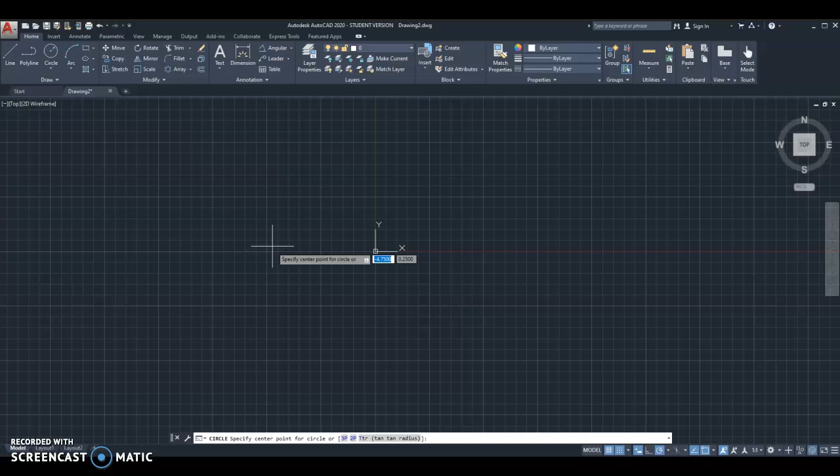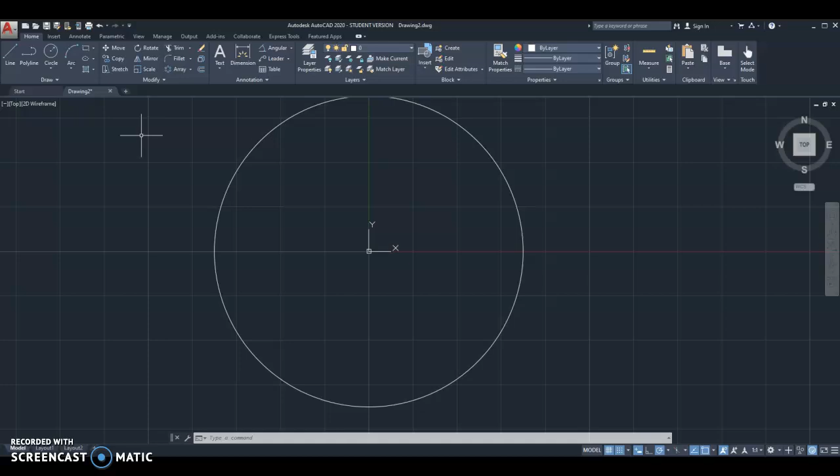I'm going to start with the front view and start by drawing some of the circles. So I'm going to start with a circle at the origin, 0, 0. And the flange has a diameter, so D, enter, of 3.5. The main hub has a diameter of 2, D2. The through hole has a diameter of 1.

And there's a taper on the far side, like a chamfer, that's going to show up on this front view as a hidden line, and it has a diameter of 1.5. So I'll just switch over to my hidden layer. As a reminder, you should be using your template that we created so you don't have to be recreating these layers every time. And this has a diameter of 1.5.

Now the flange has a bolt circle. It has 8 holes that are equally spaced, and they're on a bolt circle that has a diameter of 2.75. Bolt circles are just imaginary circles that are used to locate holes. And so we're going to use the center line layer for that because it passes through the center of the holes. And so it has a diameter of 2.75. Okay, so those are all of the concentric circles.

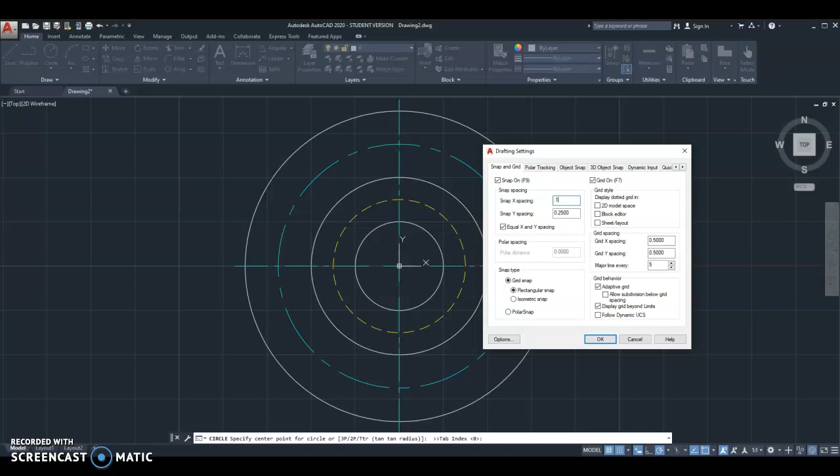My grid snap isn't wanting to snap to any of those locations, so that tells me I need to adjust it. Let's go to snap settings. Right now it's set at 1/4 of an inch. I might need it to go down to 1/8 of an inch, 0.125. Let's try that again. There we go. I have my object snap turned on, but I haven't taught you how to use that yet. So with the grid snap, the snap mode will allow me to snap right to that point where the bolt circle and the center mark intersect. So I'm going to put the first hole there, and it has a diameter of 0.25.

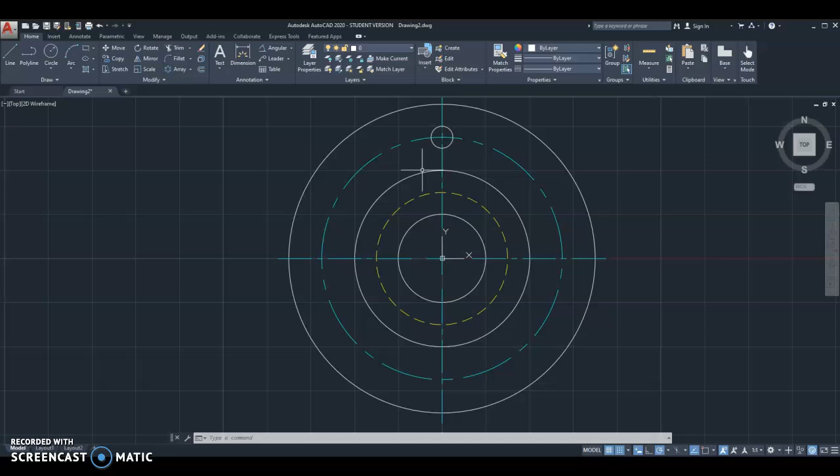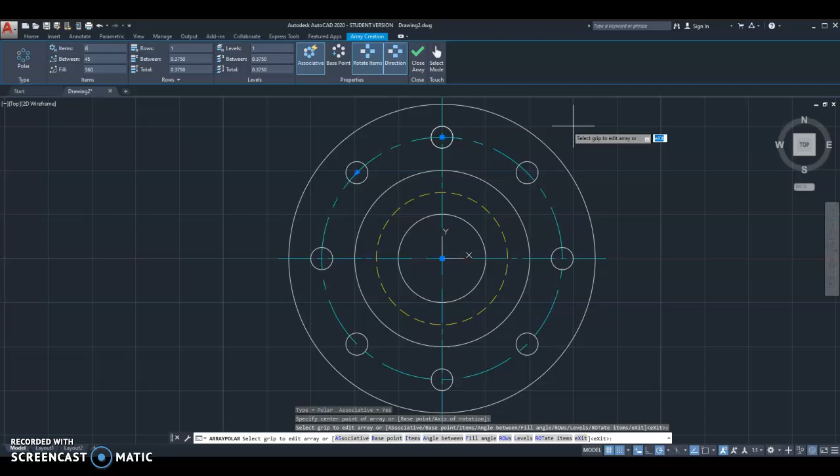Now instead of drawing 7 more circles, I want to take this one circle and create a polar array from it. So I select array, I choose the object I want to array, finish my selection, choose the center point, and it creates an array. AutoCAD takes a guess at how many items I want, and it guessed 6, which is wrong. I want 8. I do want the fill angle to be 360 degrees, so it goes all the way around, and I will leave it as associative. I'm pretty confident I don't need to make any changes, so I'll just close that.

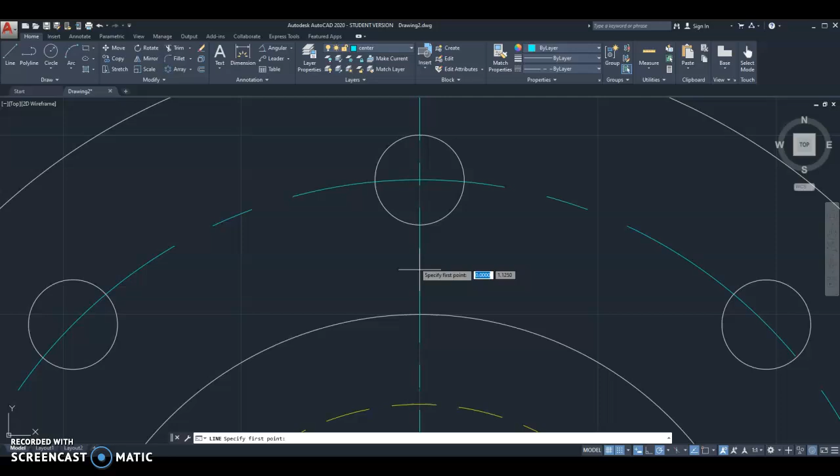Now I still need some center marks going through these circles at the 45-degree angle. Drawing them at 45 degrees wouldn't be too hard, but I'm going to show you how to do it with a copy rotate. So I'm going to switch back to my center layer. I'm going to draw a line that passes vertically right through there, then select that line and rotate it about the origin, 45 degrees. It's important to recognize that you don't always have to draw everything in its final position. You can draw it elsewhere and then move it into place, as I did here with the rotate.

Now I want 3 more of these, which I could do in a polar array, but I've already shown you that, so I'll do a copy rotate. That begins with a rotate. I select the item, finish my selection, choose the center point, and rotate it 90 degrees. Whoops, I want to undo that because I forgot to copy it. So select, choose the center point, C for copy, enter 90, and that puts one down there.

I could do another copy rotate, but let's show you how I can duplicate these center marks with the mirror command. I'll choose mirror, pick these 2 lines, finish my selection, then click 2 points along the mirror line and enter. So now I have this front view complete.

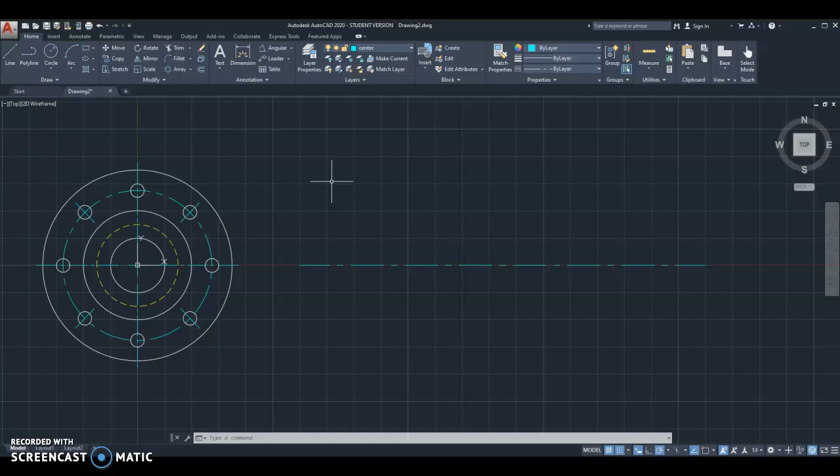So the first part of this, the end of the hub, is 2 inches in diameter. So I could use some construction lines to come over from here. I guess I will do that. Bring one construction line over. I'll bring another construction line over, and then I'll connect those 2. And then I can delete the construction lines. The construction lines are just temporary things that help me locate things like the top and bottom of this hub.

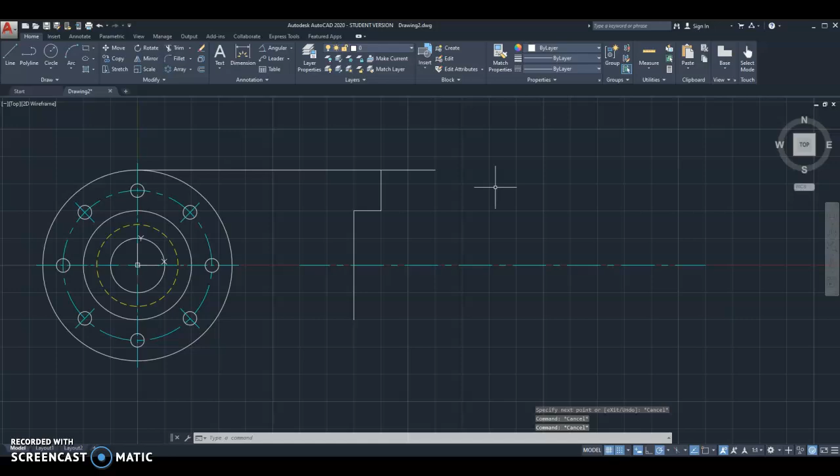And I come over 1/2 inch, 0.5, and actually, you know what? I think I'm just going to draw the top half of this and then mirror it. I've shown you how to use the mirror command now, so we should probably start using that to our advantage. So I'll draw a construction line over here to help me locate the flange, and it has a width of 0.25. So come over 0.25, and I can come back down.

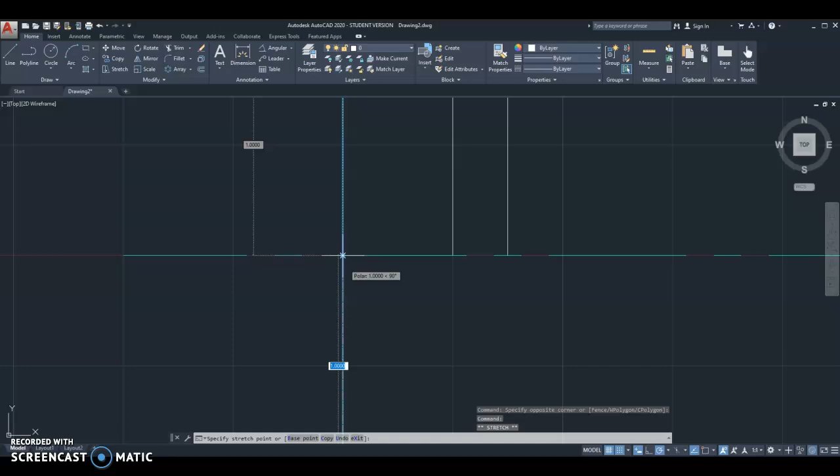Get rid of that. This I can bring straight down. So since I'm going to be mirroring all of this, I'll drag this line back up to here, or stretch it back up to there. So I can just do the top half. Okay.

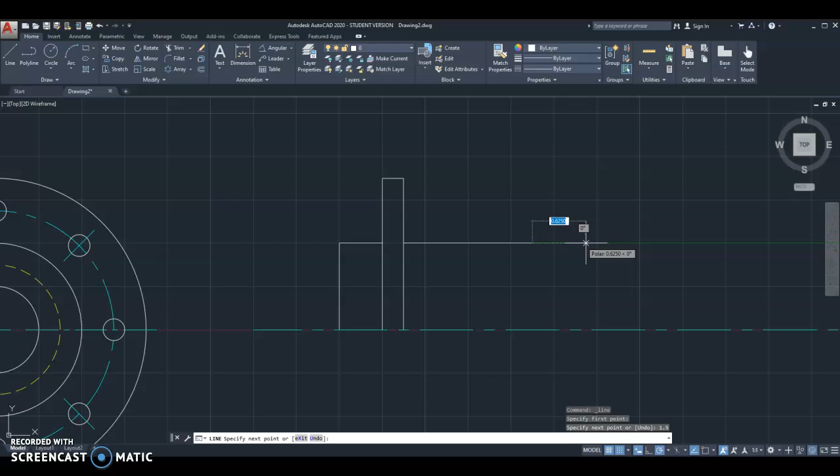The next section of this, looking at the drawing, looks like I'm going to have to do a little bit of blueprint reading, a little bit of calculation. So I've got 3.25 minus 0.25 leaves me 3, minus 1 leaves me 2, minus 0.5, 1.5. So I've got to come over 1.5 inches, and then I'll come straight down to there. And then finally, I've got the end of the taper. Now I could theoretically use a chamfer, but in this case, I think I'm just going to draw a line straight over to there.

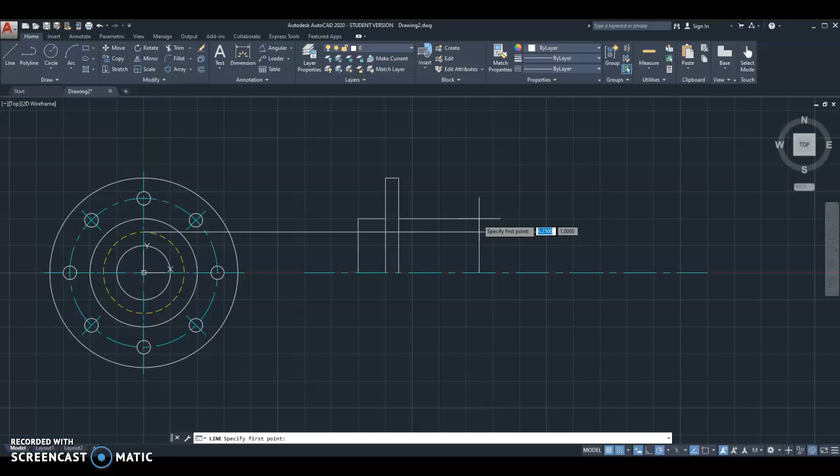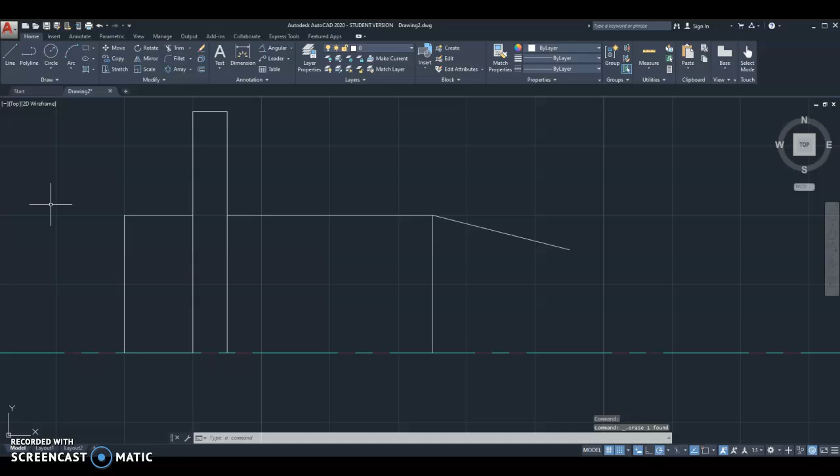I'll draw a line that comes straight over 1 inch, and then come straight down. And these are all just construction lines to help me locate this point so I can then draw the diagonal line at the angle I need. So once I've got that in place, I can delete that and just come straight down.

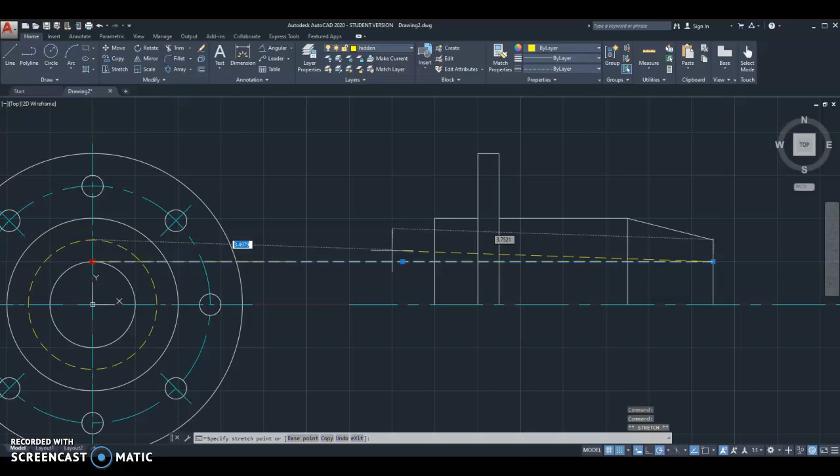Okay, I can switch over to my hidden layer and draw a line. This is the hole that passes through it. This is the bore that goes through the middle of the part. I'll just stretch that over. So I've got my center line, which ended up being too long. I'll stretch that back. Got the center line, I've got my visible lines, got my hidden line. That just leaves a couple flange holes here. So I'm just going to do the top one for now.

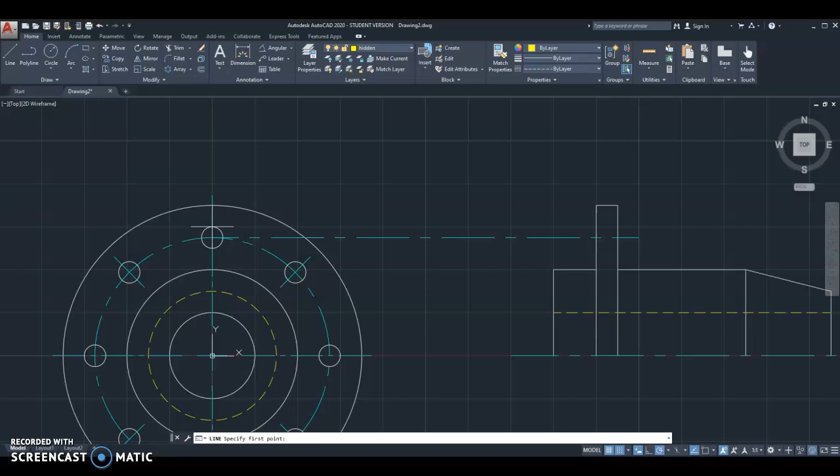And I can locate it again with, let me switch to my center layer, with a construction line that goes from the center of this hole all the way over to here. And then I can use some hidden lines from the top of the hole and a hidden line from the bottom of the hole. Oops, didn't quite get it in the right place. There we go. Alright, and then I'll stretch these lines over.

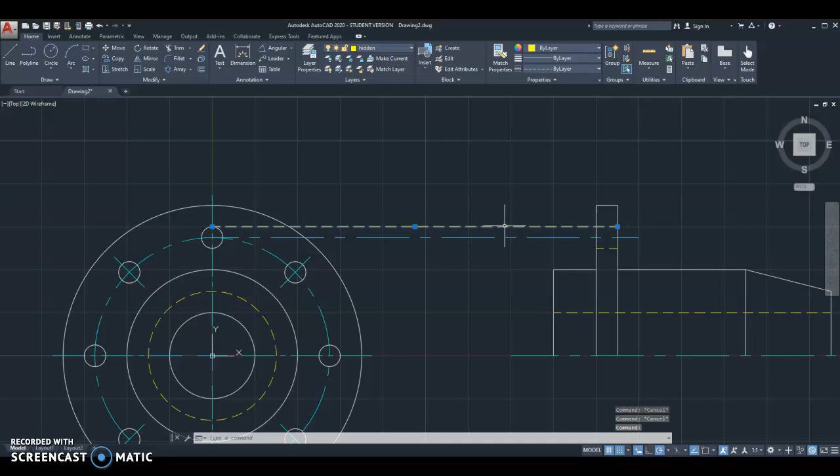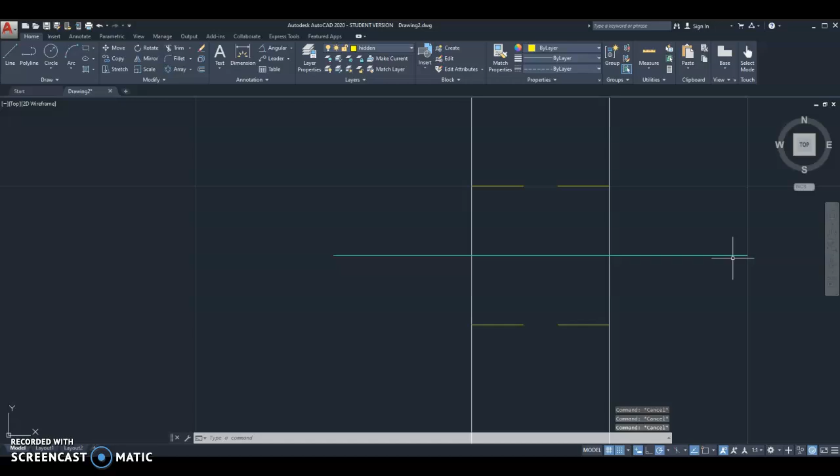So again, remember that these hidden lines are describing physical parts, actual real parts. And so the hole ends where the edge of the part ends. So that's where the hidden line should end. I sometimes see students drawing hidden lines that extend out beyond the edges of the part, and that's incorrect. Hidden lines end where the edge of the object ends. It's the center lines that are imaginary. They don't really exist. They're the ones that can extend out beyond the edges of the part.

So I've got all of this drawn. I think now's the time to mirror all of this about my center line. And see, it cut my work in half. I didn't have to draw this bottom half. I just mirrored it.

And the last thing to do is to make a hole here. It's the same size as these other two holes, though. And since we now know how to use the copy command, we learned that, I think, in the last chapter, I'll highlight those two hidden lines and that center line, and I'll copy them up to here. Actually, I guess I didn't need to copy that center line. That's redundant. I already have a center line there.

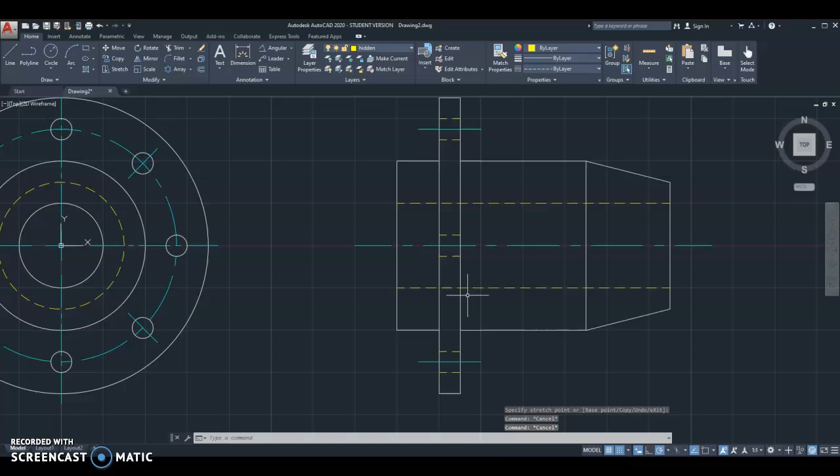But now, I think this drawing is done. It always pays to double check. I'm going to look over and see that I've got everything. And yeah, it looks like I do. Maybe I might shorten up that center line a bit. It's kind of sticking out a little farther on the right than it was on the left. That kind of evens it up there. The centers are perfectly aligned with each other. I've got all the appropriate hidden lines, all the appropriate center lines. I think that's good. So I think we're done here.